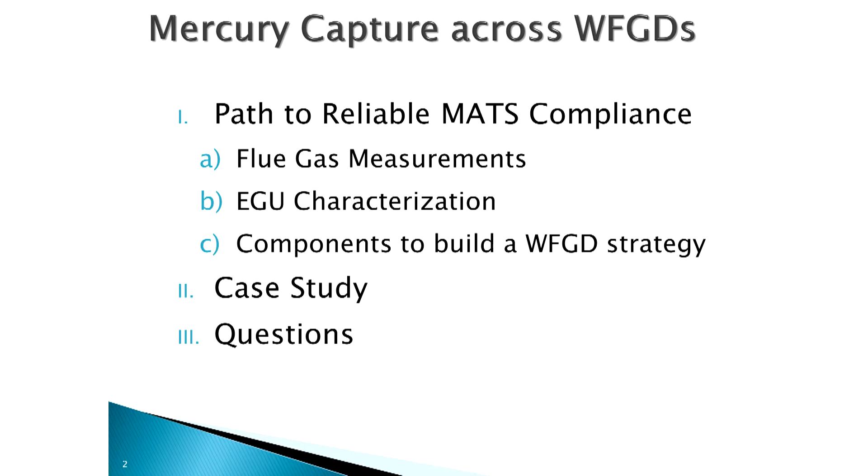Now, I have to come back for a moment before I get into my presentation. Yes, I've been put here before lunch to kind of keep you participating and awake. I've noticed a lot of empty coffee cups at this point. I assure you, I went and talked to the cafeteria, they don't stop serving until 2:30. Believe me, I will not keep you until 2:30, okay?

But the question I have for you right now is, how many of us fly? Just a show of hands, how many of you fly? That's great, that's great. How many of you are pilots? Okay, so about 2 of you, okay? There's really a difference between flying and being a pilot. If you look at typically your Chicago O'Hare, which I've been through quite a bit recently, you see a lot of people that fly, okay?

If we look at flying historically, in the beginning we were flying basically open cockpit planes, exposed to the environment. But more importantly, how did we know we were getting where we were going? Well, they basically had a compass and a little watch. You know why the watch was there? To calculate how much fuel they had left. Of course, you want to have enough fuel to get where you're going, right, when you're flying?

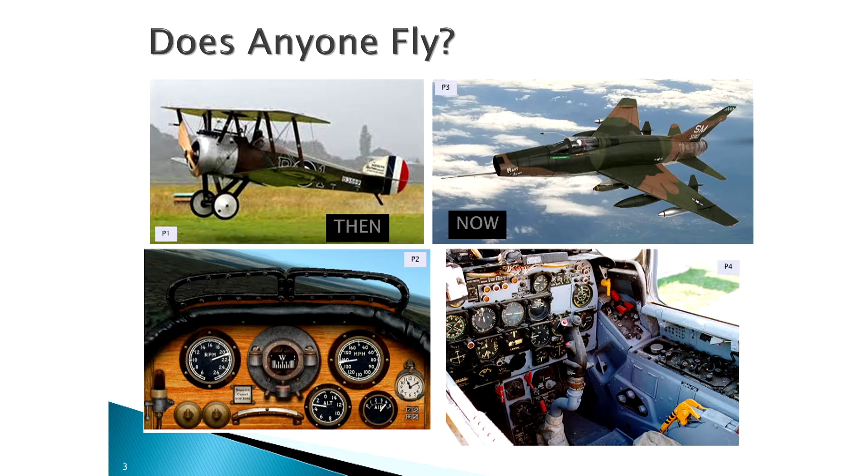Today's planes are much more advanced. They fly through all kinds of weather and get to very exotic places that we want to go to. And as a consequence, the instrumentation found in the cockpit is much more advanced. A lot of things that the pilot and co-pilot have to look at as they're flying, as you sit there with your iPod open or your newspaper, or in my case, simply fall asleep, with the assurance that when you wake up, you're at the destination where you wanted to go in the first place, why you got on the airplane.

And you're going to wonder, where am I going with this? Hopefully you'll be able to see that by the end of this presentation. So here are the 5 different things that I'm going to go through today that are going to get you to a reliable Mercury capture along with a wet FGD. These are the things that the utilities are looking at right now to make sure that they are MATS compliant.

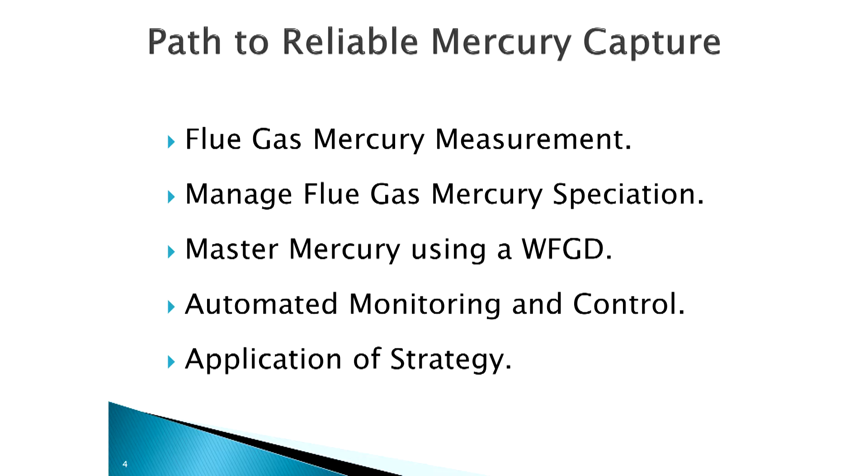Let's talk about flue gas measurement for a moment. Connie has already talked about this a little bit, but I want to re-emphasize this. This is probably the most overlooked aspect of any demonstration or any set of data that is presented in any conference anywhere you attend. Many times when we run a demonstration, we will insist that you have multiple means of making a measurement, of monitoring that mercury. And many times people will get up and say, hey, I've got great correlation between 2 methods. I'm showing you here on the left and on the right.

On the left is total mercury, and Connie has introduced that earlier. This is a great correlation, 0.97. So if somebody gets up and says, hey, we got great correlation, we're okay. Unfortunately, this is where you want to be, where the CEMS, the continuous measurement, is equal to

the measurement by carbon traps. If you're over here, you have a great correlation, but what is that telling you? It's telling you your CEMS is not beginning to give you the accurate measurements. This is a classic problem.

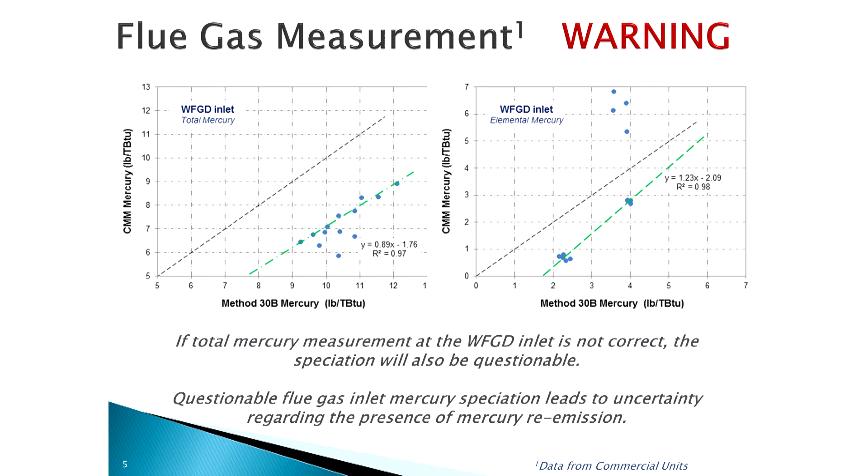If you don't know what's going on around your mercury measurement, you don't know where you're going. If you don't know the total, which is the easiest to measure at this particular point, which is at the inlet, there's no way for you to get any kind of information on your elemental composition at the inlet. And that becomes a critical problem. If you see this kind of data, you have to ask, what is going on? You have to raise a red flag and say, let's take a step back. We really can't go any further on this.

This is some data that was collected over a series of demonstrations to show you where you really should be looking, okay? And here you can see that we actually match up on the line, so that your carbon traps match your CEMS, and the data you can begin to understand. Yes, you're going to see outliers in that data, but then you have an opportunity to begin to understand why that's an outlier and help the industry and help the CEMS people actually figure out what's going on.

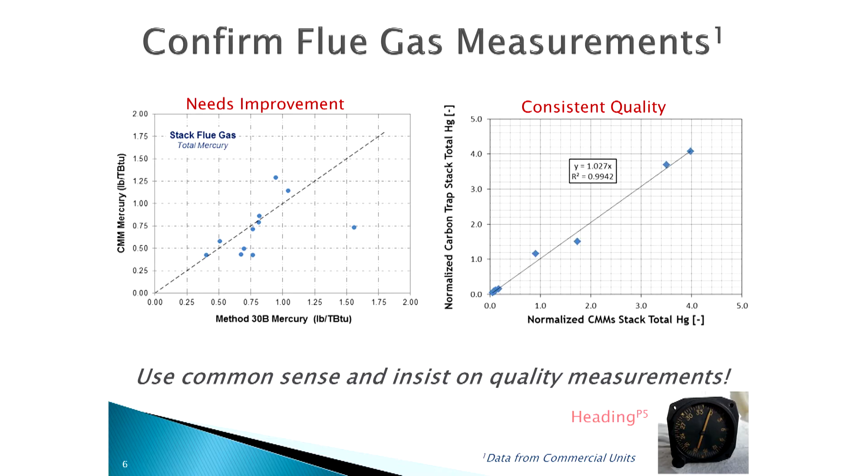You definitely want to get high correlation coefficients and good agreement between multiple measurement techniques. That's the first step. And as I've been saying, if you don't know the heading, which is the mercury measurement itself, you have no earthly idea where you're going.

The second is you have to manage the flue gas speciation. And Connie has already talked about this, the fact that the oxidation fraction depends on the chloride and the bromide concentration, and it is impacted by all the other things in the flue gas.

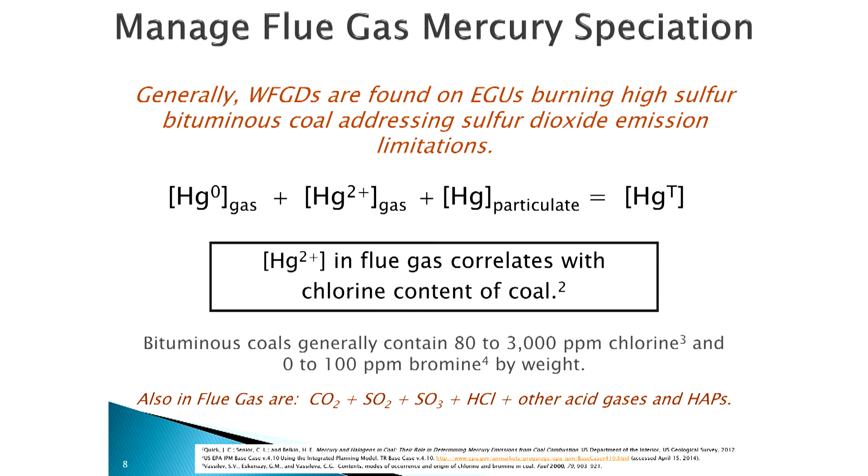This is, again, kind of a repeat in the sense that there are three things that you do to control your oxidation state. You can do a fuel mix. A lot of the utilities are doing some fuel mixing, which means that they're bringing in chlorides from a different fuel source to increase their oxidation. That's a very difficult thing to do because it requires more space, more land, and management of very large quantities of fuel. The second is a fixed asset like an SCR, and we've talked about the benefits of that.

One of the things that you need to keep in mind is two things. With an SCR, the relative age of that SCR is going to degrade the amount of oxidation of mercury you're going to get, which means it's going to become more and more difficult for you to meet your MATS compliance over time. The second thing you have to keep in mind is if you don't have good exposure of the flue gas to that catalyst, you're not going to get the full extent of your oxidation. So now soot blowing, the buildup of particulate on that catalyst becomes a significant thing.

And if the plant is not continuously looking at that or monitoring that, you will get degradation in your oxidation. And then finally, as Connie has talked about, there are boiler additives and flue gas additives that will actually help you increase that oxidation. And they can be used in any kind of combination.

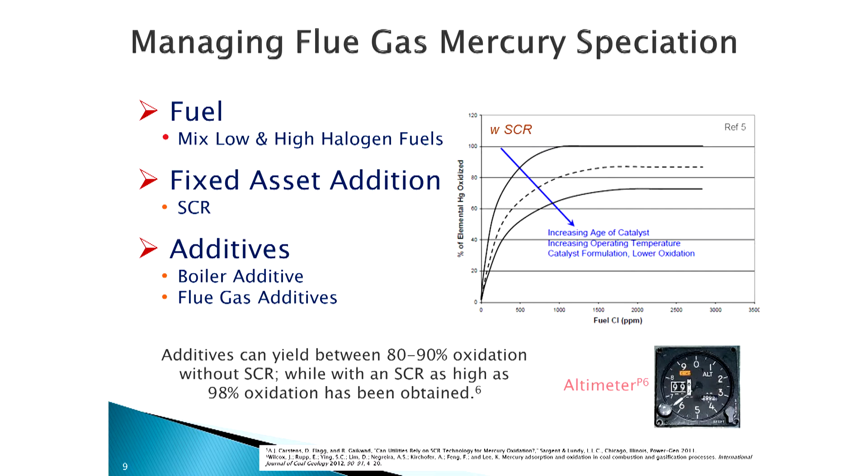The point of the matter of those few slides is this establishes your altitude. In other words, this establishes how good you can get with the equipment that you have on site already. Okay? If you can't get to your oxidation state of mercury, get that below your MATS compliance limit, you have no chance of meeting MATS to begin with.

This is a simple example, and one of the things that in my industry we complain about is we talk a lot about percent oxidation and percent speciation. You've probably done the math several times, but you have to be aware that 80% oxidation across the board does not guarantee what the elemental concentration is going to be. 80% of 34 pounds per trillion is a lot different from 80% of 8.33 pounds per trillion. So percentage is great, but at the end of the day, it's really how much elemental mercury is in your flue gas, and that's what you want to manage.

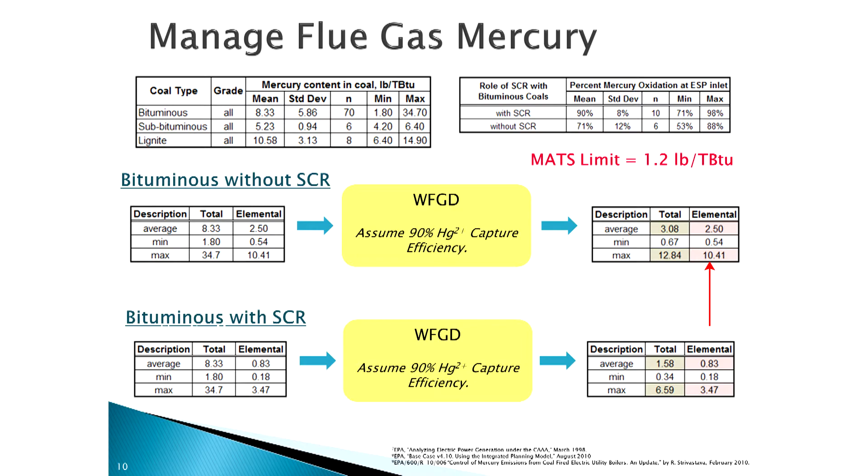Because at the end of the day, a wet FGD captures ionic mercury, and you really want to get this number down to below 1.2 pounds per trillion. That's where you're trying to get to.

I'm going fast. I haven't lost anybody yet. You still all there? I haven't seen too many iPods come out, so I guess we're still okay in terms of flight. So I'm still entertaining you, keeping you here.

So once you've managed the speciation, and you can do that in several different ways, you can get to that point in many different ways. But then you have to master mercury within your wet scrubber.

I've taken a very basic approach to this. I've drawn, not a black box, but actually a red box around the wet FGD and schematically presented it here. Basically, what you're seeing here is this is your flue gas coming into this box. You have a lot of things going on.

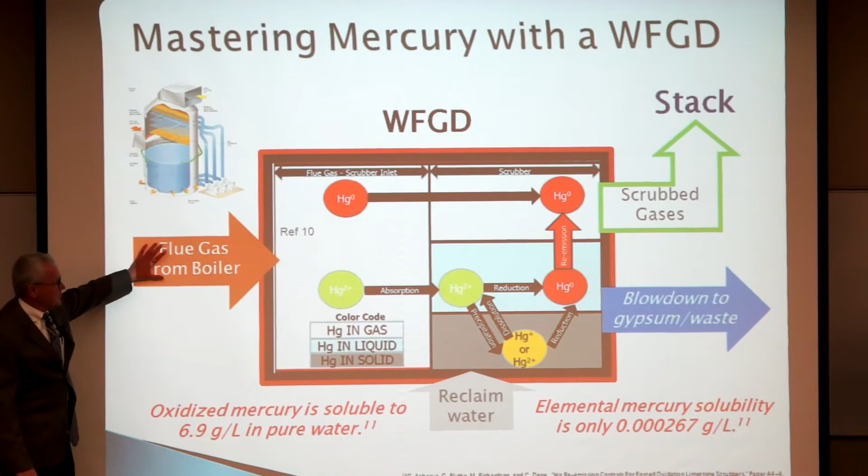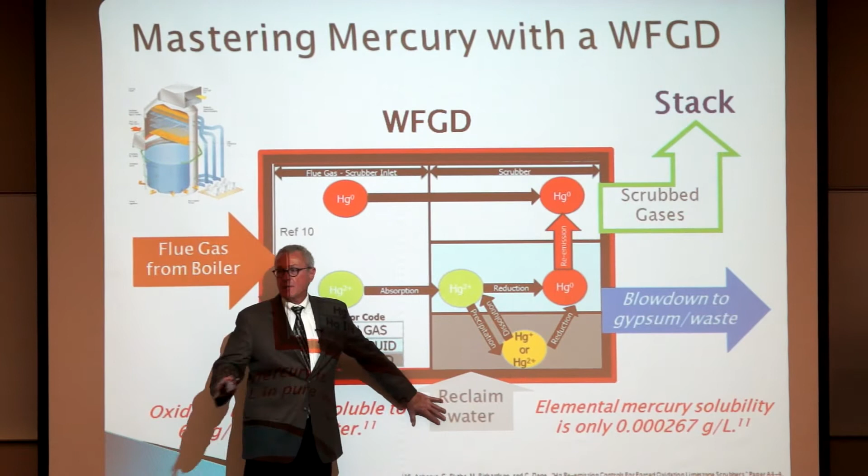You have two things coming in: your flue gas, and reclaimed water, which is absolutely what you want to do. Your reclaimed water is coming into your scrubber. And you have two things coming out, typically: your scrubbed gas and your blow down to either gypsum production or wastewater production.

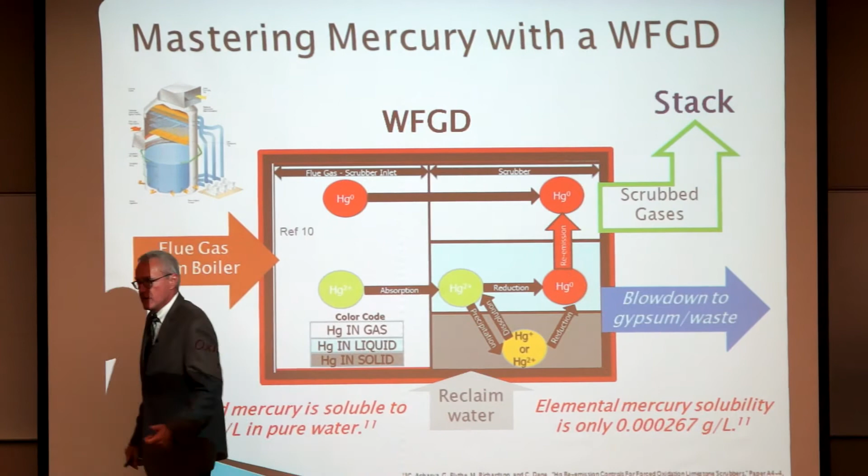And quite frankly, the utility has to manage all of these things in order to manage the stack number. That's the point. If you have no other memory of this presentation, that's the thing you have to remember.

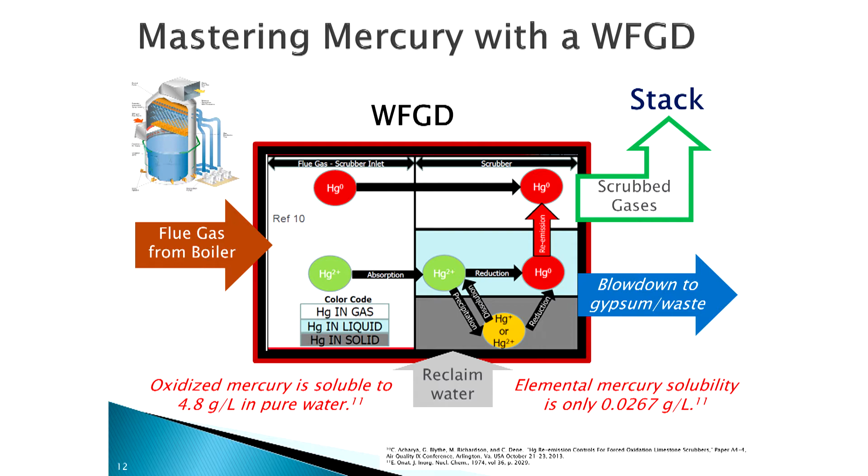Because in the scrubber, just like in the flue gas, there are many different forms or places where mercury hides. It hides in the flue gas, coming in as elemental and ionic. It hides in the water. The ionic can be absorbed very effectively. Very soluble ionic mercury, very insoluble elemental. Elemental will typically go through the scrubber because of the low solubility in the water phase.

You will also have mercury captured within the scrubber itself, in the solids as well as in the water. When these solids are removed with the water to wastewater, they can, in fact, come back in as soluble mercury back into the scrubber. So it initially acts as a capacitor, if you will. And because it's a capacitor, initially you have a high loading of mercury, which means you can exceed, in the stack measurement, more mercury than you actually are bringing in your flue gas. But that's another story, and I don't want to get into that at this point. The point of the matter is you have to be aware of these different forms of mercury. You do, in fact, manage them, and you manage them in many different ways.

We're talking here about a phenomenon called mercury reemission, and what happens within that scrubber, within the water phase and the solid phase of the scrubber, is you actually see the elemental mercury increase from the inlet of the flue gas to the stack itself. And where does that elemental mercury come from?

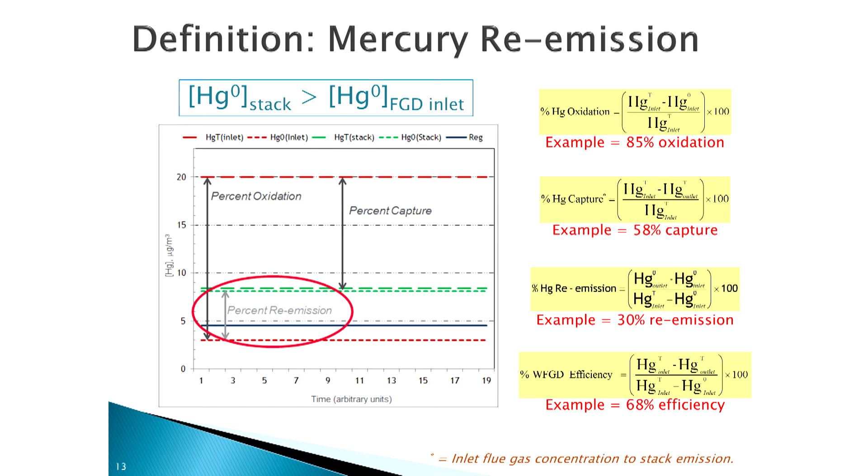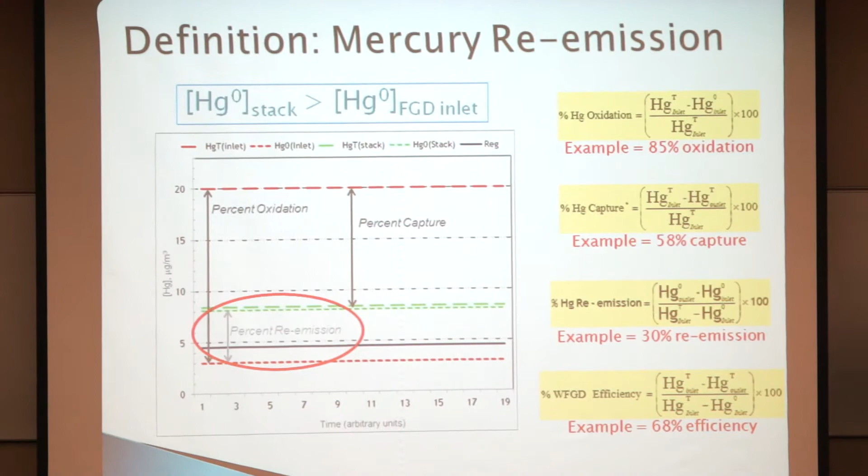This is meant to be a cartoon, a cartoon of analysis, okay, CEMS data. And what you actually end up seeing here is this is your MATS limit right here. And if you look closely, this is your elemental mercury coming in at about 0.3, or at 3 micrograms per cubic meter. And this is your elemental mercury at the stack. It's higher. And that difference is what we call reemission in the industry.

If your re-emission goes up, your stack emissions are going up. So if you don't control this, it does not matter how good your oxidation is. It does not matter what your emission limit is, because if you don't manage this, you will not be in compliance. The key here is the difference between control and compliance.

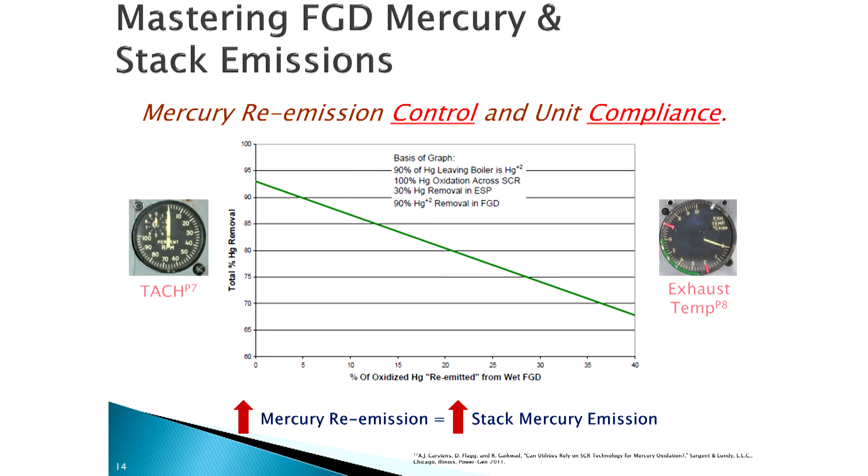This tends to be your tach. If you fly, this is your tachometer and your engine temperature. This is what drives the whole thing. If you don't keep an eye on this, you're not going to be able to keep that airplane in the sky.

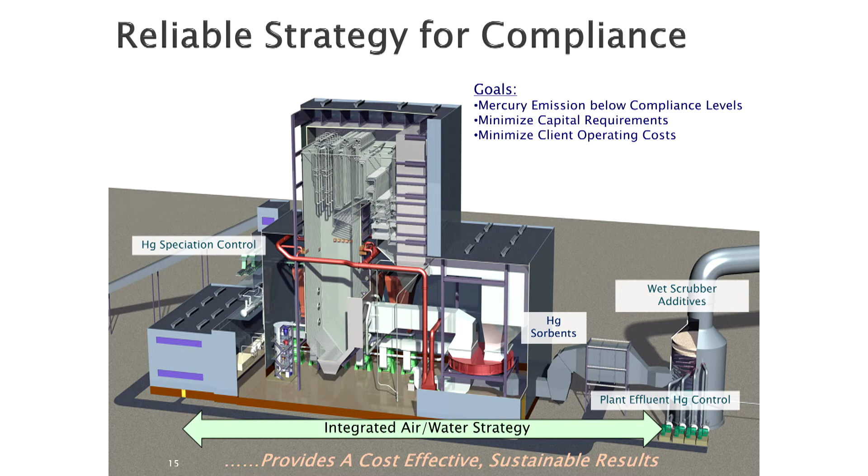So it is about a reliable strategy that goes across the whole plant. You have to control the speciation, you have to control the scrubber and what's going on within the scrubber, and you want to look at what's going on around the plant effluent.

Okay, so there are three things that you can do around your scrubber.

Consistent - you have to get your wet scrubber to become consistent. Like everything else, it works. They're generating power. The power utility is about making sure your lights are on at the end of the day. You can have your heat in the middle of winter.

Scrubbers are there. They take care of SO2. That's their primary function. They haven't been required to look at mercury removal or co-benefit. It's time now to put another instrument on their instrument panel to pay more attention to that so that they can consistently meet the MATS requirement.

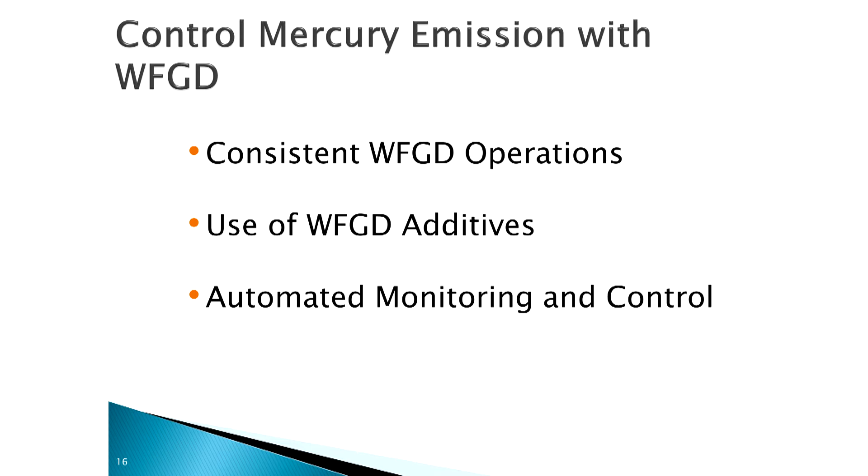The second thing they can do is use wet FGD additives to actually help that control, to have a strategy, a lever, proactively to control mercury within the scrubber.

And then finally, best of all, you want to automate that so that it's constantly being monitored and it's not through all of the swings, including, as we heard this morning, talks about startups and shutdowns, and it will actually respond to those kinds of changes in load automatically.

So let's talk about some of the consistent wet FGD operations. This is taken from the literature. This is well known. If you're looking at data from a submission, you may not see all of this information, but these are some things that are important. I'm not going to read all of them.

Sulfite, liquor pH, and ORP are things that can be monitored within the scrubber that gives you some idea of what's going on. I can tell you right now that from my perspective, these are great.

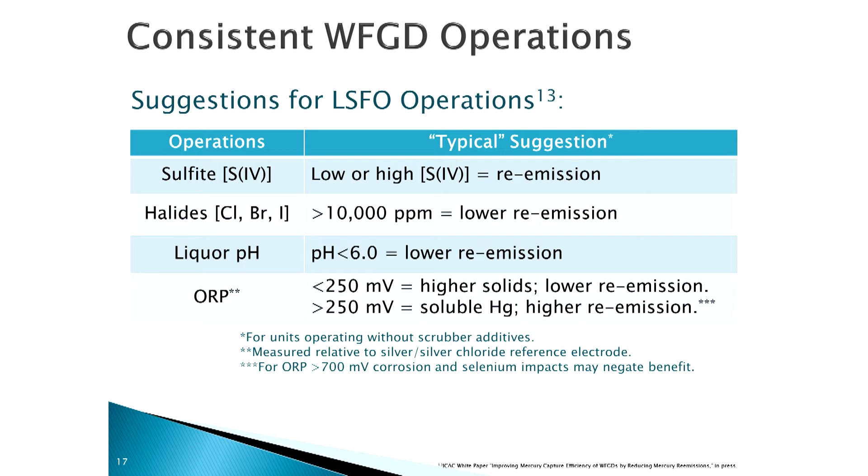These are general, consistent operational parameters, but they are not levers that you are going to pull or knobs that you are going to turn as an operator to get your unit into compliance immediately to avoid it from going out of compliance. And there are benefits and there are disadvantages to each one of these strategies.

And actually, quite frankly, you want to combine these strategies, optimize it, to get to the point at which you've minimized the amount of re-emission that you might be seeing.

Scrubber additives - there are a whole host of them, starting from carbon, which can be added either up front of the scrubber or into the scrubber, to a whole slew of various chemistries, and there are more coming on the market daily. Each of these has their advantage and disadvantage.

The key here is re-emission and mercury control starts with controlling mercury. And each of these binds mercury and prevents it from participating in the reductive reaction that generates elemental mercury. So simply put, all of these function one way or another to complex mercury and remove it from the wet scrubber.

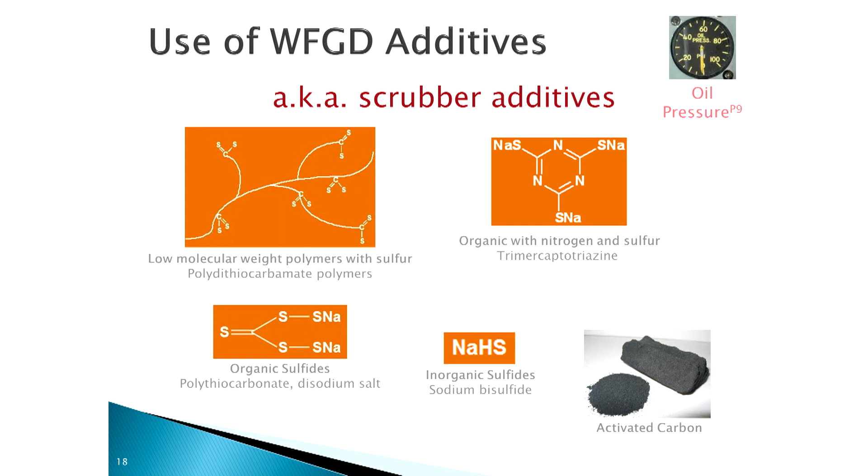And finally, automation and control. Automation control is absolutely critical because now this unit not only captures sulfur, but it's also going to be required to help you capture...

Yeah, I'm a Harley driver. What can I say?

It also is now capturing mercury. And so as a consequence, you want to constantly look at the unit operation and how it's affecting the successful capture of mercury. So you're looking at the chemistry which is going on, the unit operation around the wet FGD, as well as the unit operation around the boiler, because as we've heard already this morning, boiler operation also impacts mercury coming through this system.

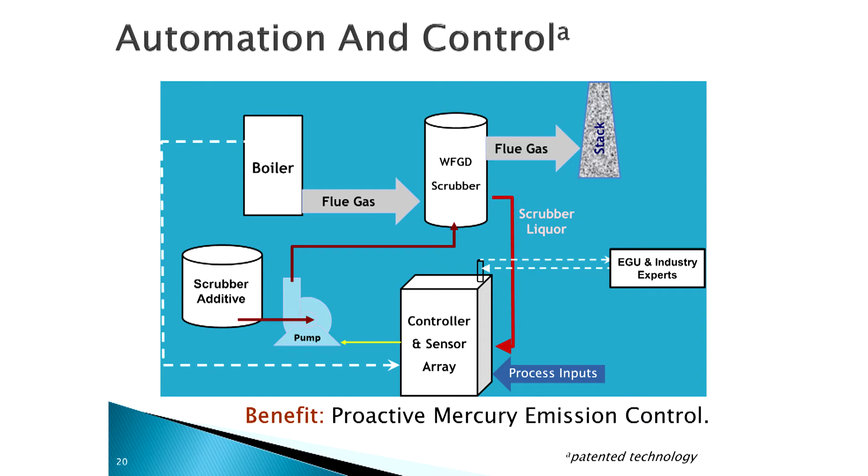You have a feedback system to a smart controller with an algorithm and sensors that has the process inputs, the chemistry inputs, and then controls your scrubber additive and basically is tied into controlling your compliance. This automates the system. It allows you to control through shutdowns and startups and swings in load and responding to the demands put on the unit.

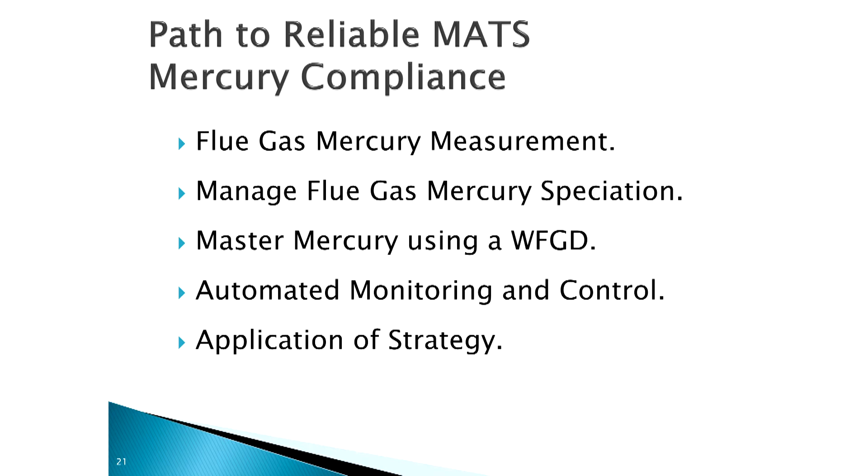So, all in all, this is about all 4 steps, 5 steps, measurement through strategy application. I want to give you a quick example - this is a unit that we ran a demonstration on that has been worked on. Air heater, the key here is it's got an SCR on it to give you oxidation, fabric filter, wet FGD.

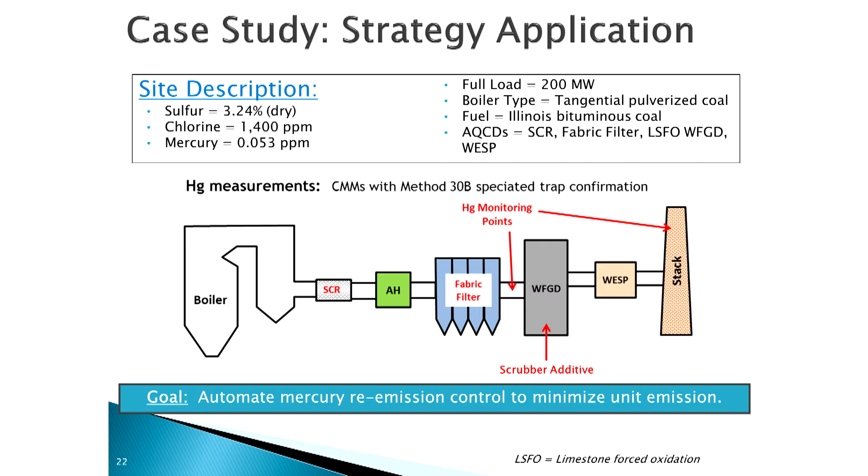You can also look, you have the notes, so I don't have to go through. You can look at the sulfur content. This is a bituminous coal unit. This is the data of the first 50 days of data that was collected from their CMMs.

Units like the wet FGD will in fact - and frankly it doesn't really matter what is up front of that wet FGD - it collects mercury. And over time, if you don't manage and control the mercury, you end up having these spikes in emissions, which end up being issues with respect to compliance.

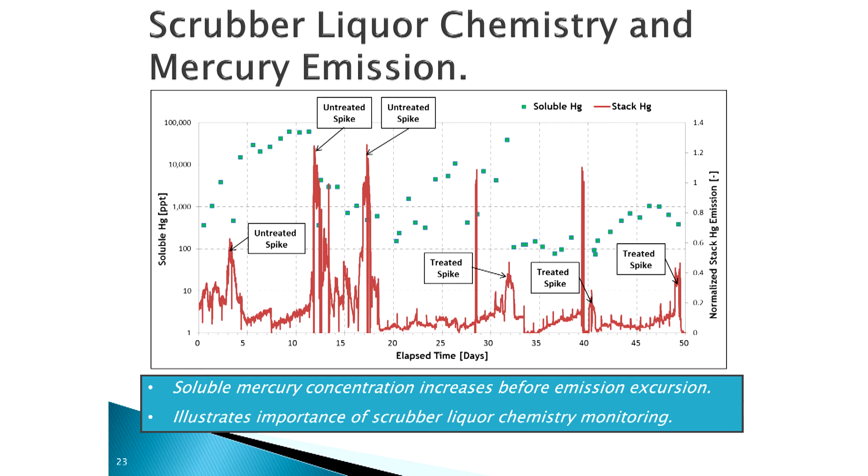The other thing to look at here, does appear to be a correlation between the soluble mercury content, which is in logarithm scale, versus the emission itself. People said that they couldn't see that quite well.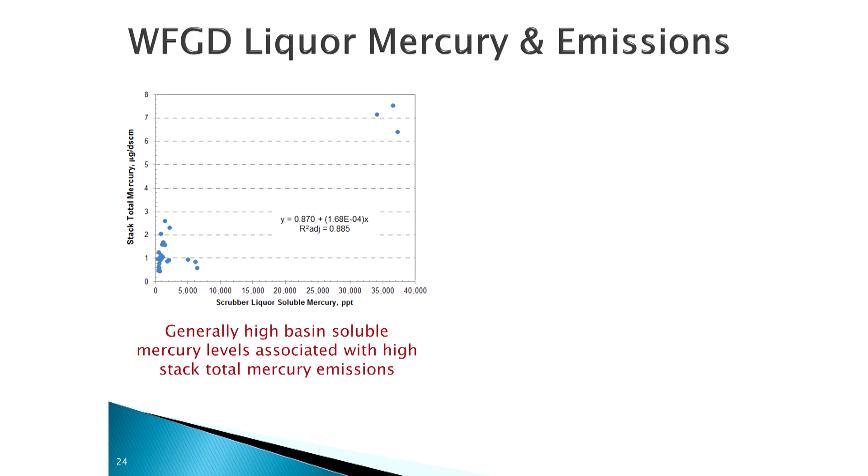But in point of fact, if you look down here, there's also scatter in this data, as you can see, and the question becomes, what's causing that scatter? If you can explain the scatter in this data, you can begin to understand where all of this is coming from, how to control these units. And I contend that there is a way.

Here is the model that would fit to this data. And we can only fit this - you can only begin to do this work if your measurement is good. If your measurement is crap, excuse the expression, then you cannot get this kind of data.

This is real life, unit operation, day-to-day, variable load data, and you can see that the correlation coefficient here is 0.955. That's pretty doggone good, and you can see that the variation down in here has pretty much disappeared across here. And what has happened?

As I told you earlier, you've got to have a good measurement. What was the second thing I told you you needed to do? Control your speciation. If you don't control your speciation, you're at a disadvantage to begin with.

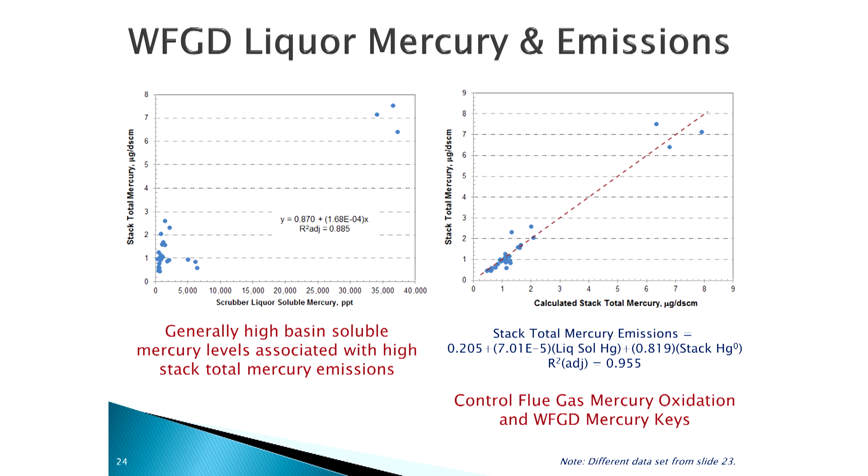When you start adding in the elemental content at the stack, that tells you about your oxidation coming into the wet FGD, and that's what happens. So we're beginning to build models.

Models lead to automated operation that allow you to be reliable and compliant across with regulations. And in point of fact, here's 60 days elapsed time that shows that we have been compliant over the 60 days. And in point of fact, this unit has been compliant to their goals and their regulations for over 12 months now.

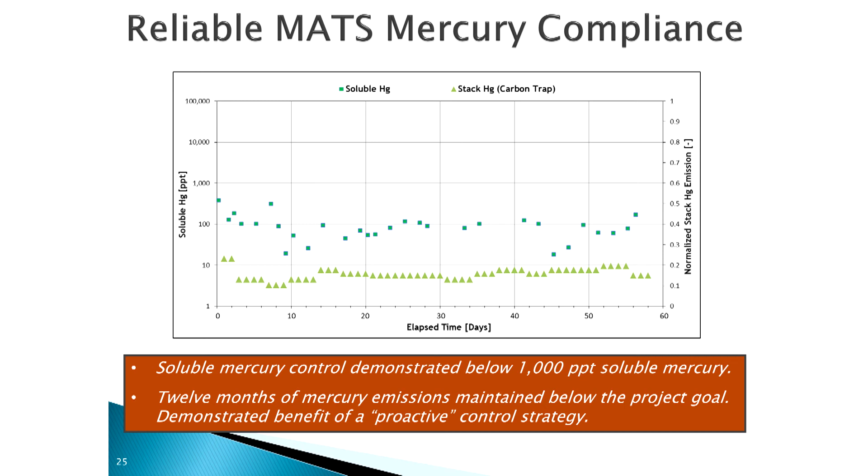So, decrease your stack emissions. Here's your summaries. Reliable mercury compliance achieved through managing your oxidation, managing your reliable measurements, and in point of fact, making applications and controlling your mercury within the scrubber.

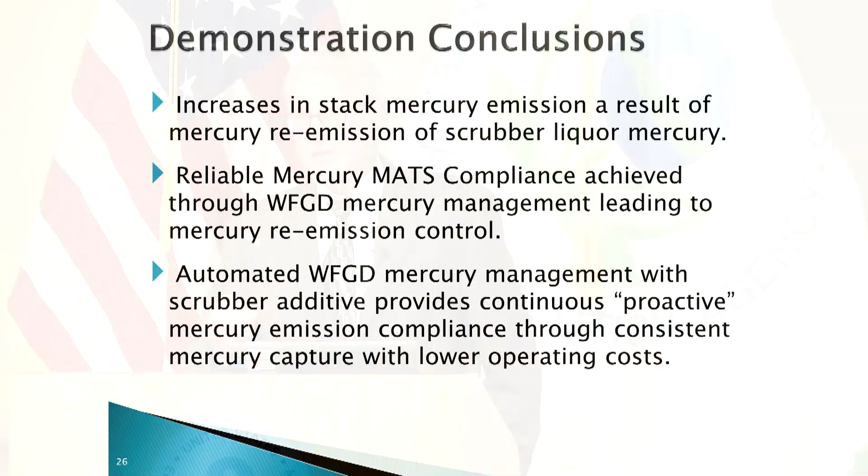We can talk about absorption, we can talk about re-emission. At the end of the day, it's about the stack measurement. It's about being proactive.

On running these units, so that when the operator comes in on the day, he can casually walk up the ramp to his control room. We can comfortably, as users of electricity, get on the plane, pull out our iPods, pull out our papers, and comfortably relax, knowing that we'll get to where we want to be.

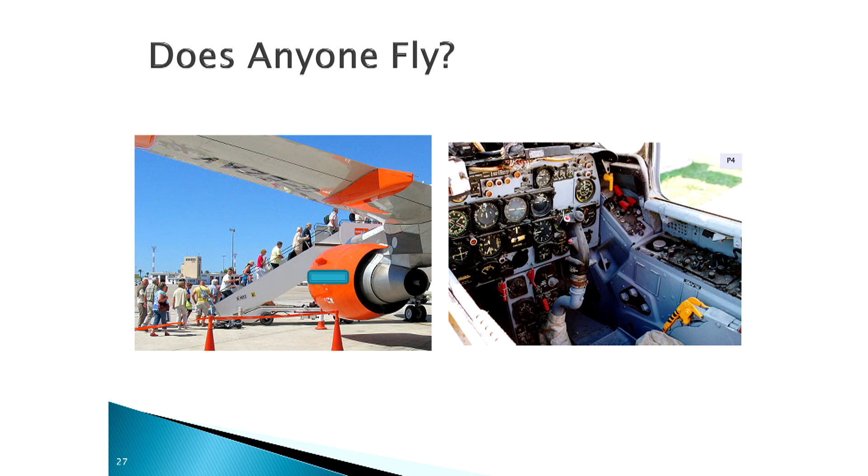Because we have the right instrumentation, we have the right information, we know where we are, and we know where we're going. With that, if you have any questions, I know I've gone fast and gone over just a little bit. I apologize. Any questions?

Why weren't there any data in the middle of those two plots? You had highs. Excellent question. Because we collected data and then we applied the solution. The application of the solution is quick enough that you don't get a lot of transitional data.

That's a great question. And actually, you don't want us to run a unit somewhere in between those. We have to get to compliance, right? Yes.

So the question is, would it be simpler to reduce the amount of water being recirculated back into a scrubber?

There's a lot of different ways to look at that question, frankly. Obviously, if we recycle water, that's a good thing, because the more water you consume, the worse it is for the environment, and we don't want to do that. So recirculating water is absolutely critical, I think.

But there are some units that would run once through or low recycle rates. And in those cases, yes, it gives them a benefit. They can run perhaps a little bit better, without the potential for re-emission.